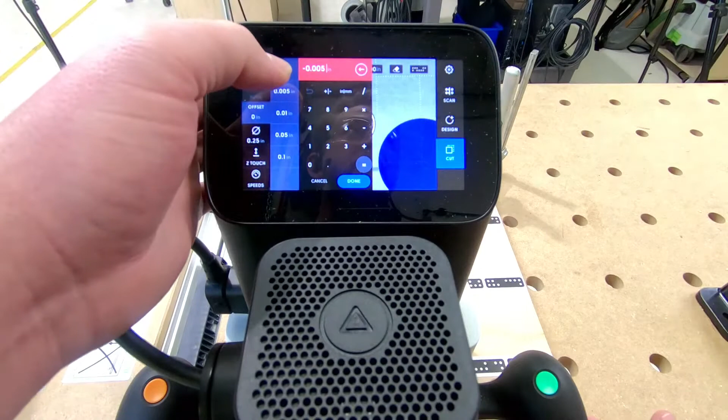Right here on the left side of the screen, I edit my offsets, go with a negative 0.005. The negative, again, is really important when you're dialing in fitment—I want to creep up on that little by little until I achieve the best fit. I just know in this case that 5,000ths is going to be perfect, so I'm going to make a quick cut here.

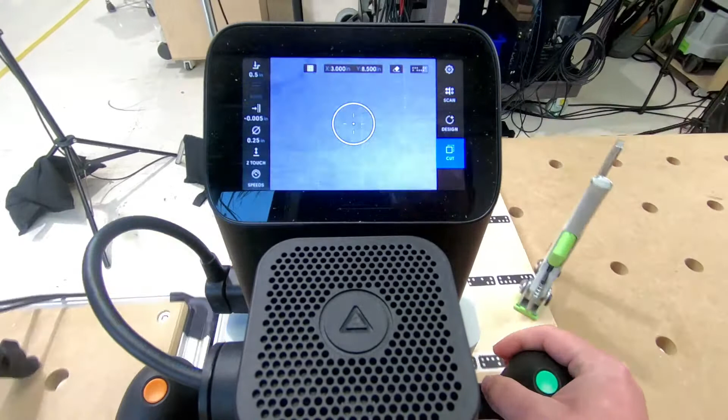And there we go—that's that exact fit we were hoping for. Just taking off 5,000ths of an inch, and even coming back to a workspace and being able to edit it because I haven't taken my tape away—that's the most important part.

So it's usually a case of measuring, doing a test with one element, and then rinsing and repeating across the whole thing. If you were doing all these holes on the top of this table, you could measure once and then come back and nail it every time. It's always good to have a handy pair of—I like digital calipers. I have them on me or close to me at all times when using Origin, because you can measure your depth with it.

You can always double check what you're working on. So we'll go back to the slide deck and have a quick look at this. This would have looked a little confusing initially. What we're looking at here is the green lines show the shape we're cutting.

If I tell it I want a 0 offset, that's the first one in the top left. We're going to cut that at the exact dimension defined in that SVG file, and it holds up. The same applies with on-tool design. So if you create a circle that's 2 inches across, a 0 offset will cut you a shape that's exactly 2 inches across. Moving on to the next image, a positive offset leaves material.

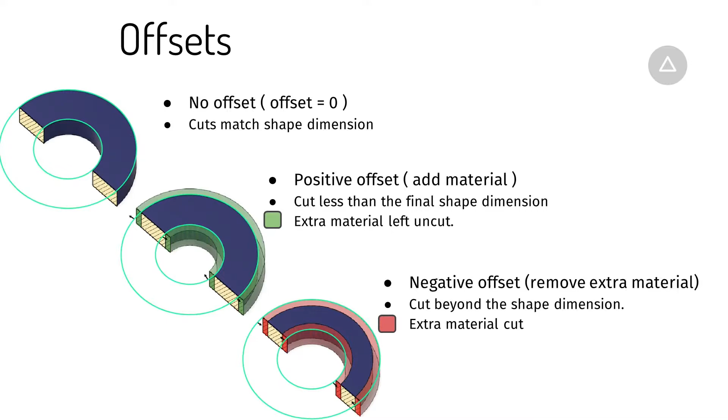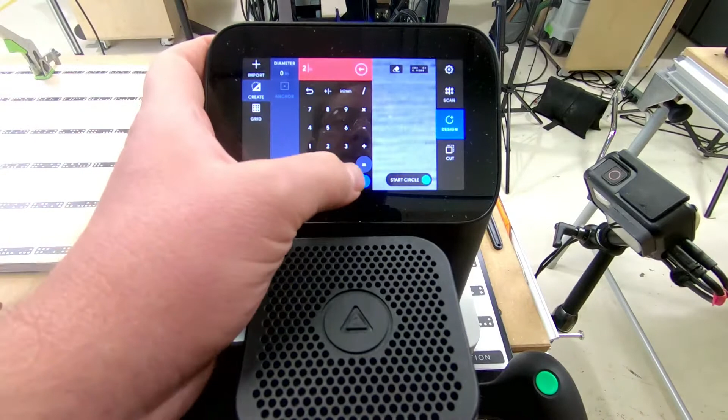Maybe we can look at just the screen for a second and create a single circle, and then do an exaggerated offset with it to show how that works. Okay, so just do a 2 inch circle. You can type this in - I remember that popped up last week. You can either type in or click and drag for circles.

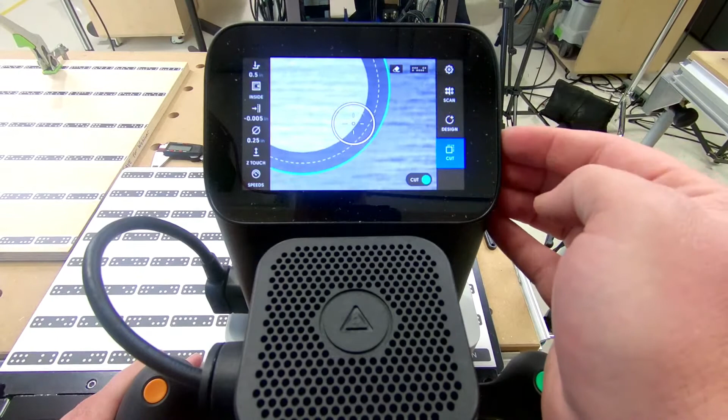Yes, so this is an inside cut. We'll move to cut mode. At the moment there's a tiny offset, so we can barely see it. We're going to exaggerate that, to 0.1, say - so that's a 0.1 positive offset. It's leaving that 0.1 inches, and you'll see the toolpath is updating live to leave extra material. The final 2 inch dimension is the green line, and you've left an extra 0.1 inch the whole way around.

If we swap this to an outside cut, and then move to the outside, you'll notice it behaves the same way. We're going to create a 2 inch puck that we bring out instead of a hole, but it leaves that extra 0.1 inch the whole way around. You can also do a negative offset, and you'll see it'll overlap that line - it'll take a 0.1 inch, making it slightly smaller in this case. You can see the toolpath is trimming more off beyond your green line.

The same applies if you flip it to an inside cut. That'll become second nature to you. Just know that if you're making a hole, a negative is going to make it larger, giving you more space for glue, and positive makes it smaller, making more friction when you go to fit it. So we will now move on to the next section in the slides.

So we're going to go through - Jake is going to demonstrate some of the basic concepts of cutting. One of the questions that cropped up was, can I set up tape on a panel and then reuse that tape, like put elements next to it and not have to constantly be taping up my plywood panels? And absolutely you can. Jake's going to walk you through some of the ideas there, how to make the most out of that.

Okay, so the reason I like this as a demonstration is we have long sweeping cuts as well as intricate joinery parts that need to be nice and tight with 90-degree corners. So I'm going to start here up the top of the leg.

Oftentimes when people are first approaching Origin, they want to treat it similar to a plunge router. They want to muscle it, they want to grab it really stiffly. If you could show this camera, their arms are very stiff and they're driving the tool more so like this. You should still have a firm grip on the tool, but it's more about connecting the tool and your body, using the fluidity of the whole thing to get a smoother cut.

So as I'm coming across, my body is coming with it versus staying in one spot and driving the tool necessarily. Back to the screen, I'll show you locking my elbows kind of into my side, coming around. Anytime I approach a corner, I slow down and I just bring it across, not aiming to keep that dot in the center of my crosshairs, but really just making sure my movements are fluid more than anything else.

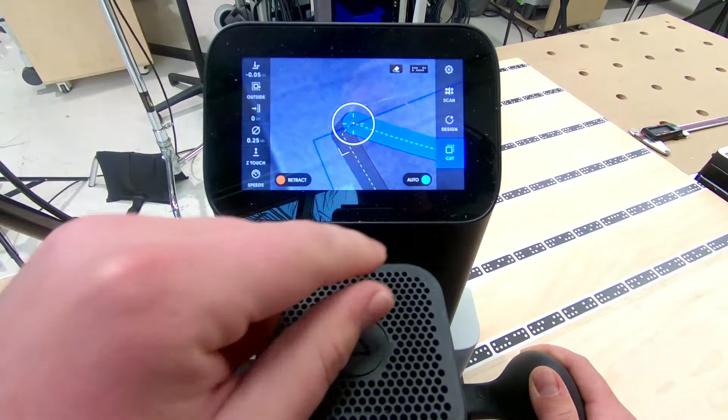These are the times where you can pick up a little speed as soon as you get comfortable, but always be sure that when you start coming towards the end, you slow down, pause - especially if you can get the entire corner in your correction range. That's when we're going to use our auto, and let the tool do the fine motor work for us.

Just help it get around those parts. Again, kind of long straightaways. Slowing down, not stopping though. Not stopping like I am and letting the bit burn there in that same spot. I want to be pretty quick on my feet as I come around things like this, but very intentional in my movements.

And finishing. And retract. Now this is for larger cuts. Later I can actually show what finer motor cuts look like. I'm going to come over to my workstation.

You see here we just have the positives of my inlay cut. But when we're doing smaller things, what I do, you can go over to this camera, I really use the side of my hands to stabilize the tool. So when I'm coming down, that side of my hand is resting on my work surface, whatever it may be.

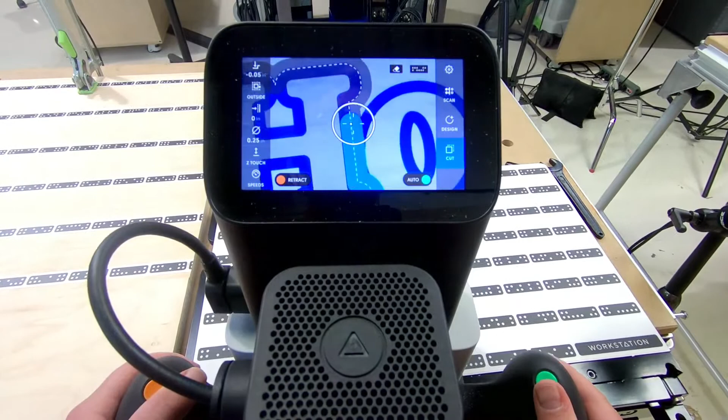And I'm using a lot more fine motor control just to kind of ease the tool around sharp corners and help. Sometimes I even, if I'm doing long straight lines, I'm hooking my finger around an edge just to make sure that everything's nice and stable.

With that in mind, I guess it's worth mentioning, Origin is incredibly good at handling sort of drift. Take advantage of that correction range and let Origin take care of the precision for you. Rather than, some people get too aggressive about trying to keep the cutter in the dead center of the correction range. So they'll do things like add a jerky motion to try and compensate, when they should just let the cutter drift through the correction range. So long as you keep it moving smoothly, you'll get good outcomes.

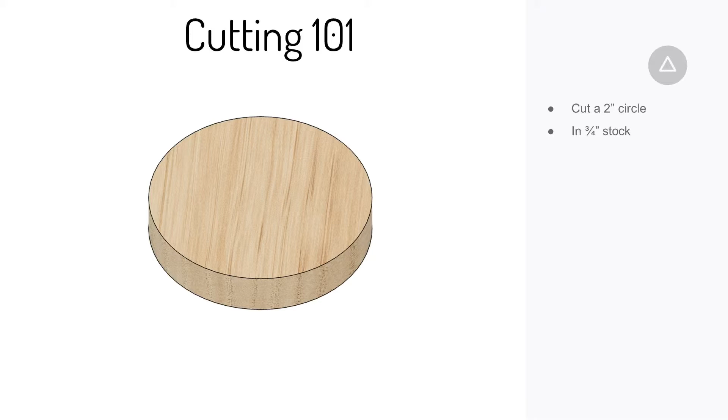Should we move on to the slides again? Yeah, yeah. So that was a brief intro into the sort of approach to cutting with Origin, getting the best outcomes. We'll get more into the actual process of cutting now, but more, that's the motion and action and strategy of how you'd approach that.

So if we were to cut, say, 3/4 of an inch deep, one of the techniques we use is common in regular CNCs and things, where we do a roughing pass and we'll cut, say, 3 passes to get to the final depth. So roughing passes are just to clear out material. It's to be efficient and just get the process moving, get all the material out that we can fast, and then we save our really accurate cuts for what we call a finishing pass.

So you'll see here one of the reasons why we do this. I've pointed out the little witness marks, so that's kind of fuzz that's left. If you were to cut with the same offset and then go, an offset of 0 at 1/4 of an inch, 1/2 an inch, and then 3/4 of an inch, this is the outcome you'd get. And you'd have to sand it a little bit.

So what we do is we do roughing passes, which is bringing back the concept of offsets. So you leave a positive offset, say 0.01 or 0.02, a very small positive offset, and then you come back at the end with a 0 offset when you're at the final depth.

So for your last pass, you're cutting at the final dimension, and the key there is the cutter is effectively very unloaded. It's just doing a final finishing cut where it cuts through the full depth and clears away all that fuzz, and you get a very accurate outcome because the cutter's not deflecting, it's not loaded. It is tempting to move quickly for your finishing pass, but once again, Jake's actions, make sure you're moving smoothly, the same as you would ordinarily, and you'll get very accurate outcomes.

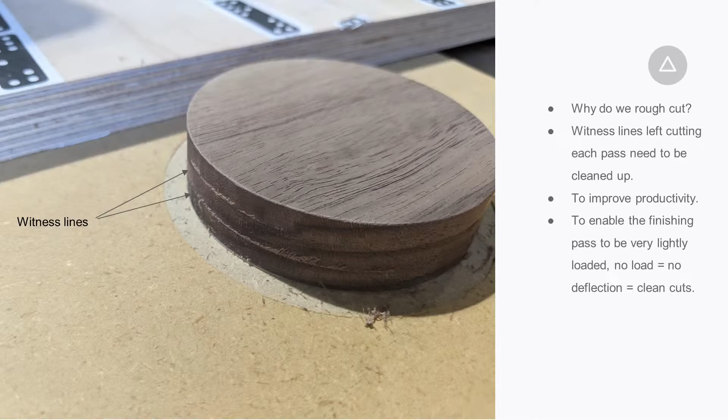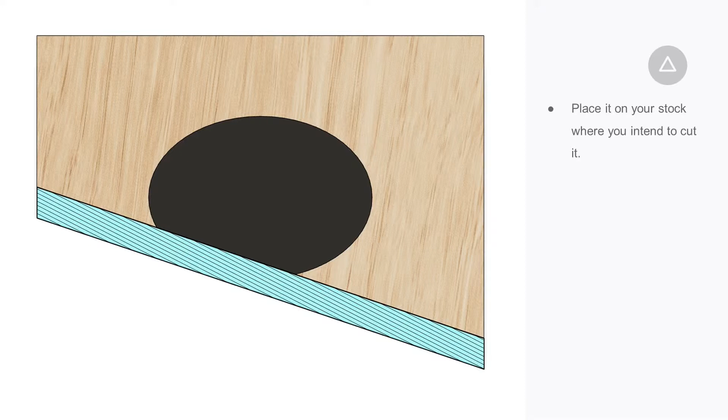So we'll go to the next slide. So yeah, the concept is, you want to cut, I forget what it is, a 2-inch circle, place your outside cut element. Next slide. That goes on your stock. We've got a little section line through here, so we can sort of see what this looks like as we go. So next slide. So the first pass, you can see the settings down on the bottom left there.

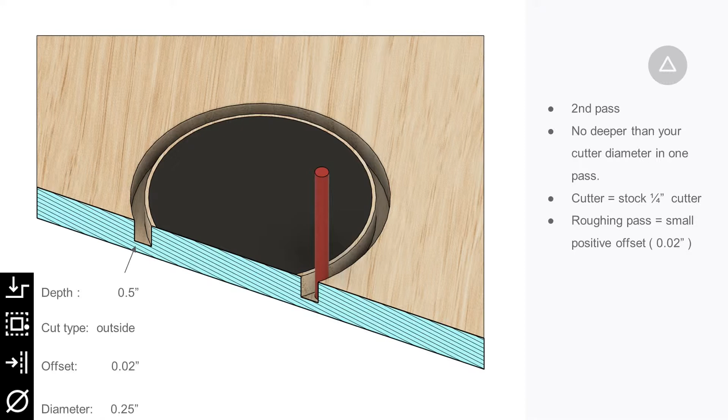So we do one pass, 1/4 of an inch deep with an offset. This is a roughing pass, so we're going to come back later and remove that 0.02 inch offset. Then we just go through and do a second pass. We can repeat this, as long as we've got cutting flutes long enough, we can repeat this roughing process until we get to the depth we like. So this is the 1/2 inch one, this is halfway through.

In this one, you'll notice this is a 3/4 inch element, and I've set the depth to 0.73 instead of 0.75. So what we're doing here is intentionally leaving a little skin on the bottom, which I've pointed out with the arrow. That's a great way of holding elements in place while you cut them. If I was to cut the whole way through, I'd be relying only on the double-sided tape behind the shape I'm cutting out.

One thing worth noting is leaving a skin means that during this pass, where I'm removing a lot of material, it's not receiving as much force on the side of it, so it's less likely to get pulled out of alignment, and less likely to break out of the double-sided tape.

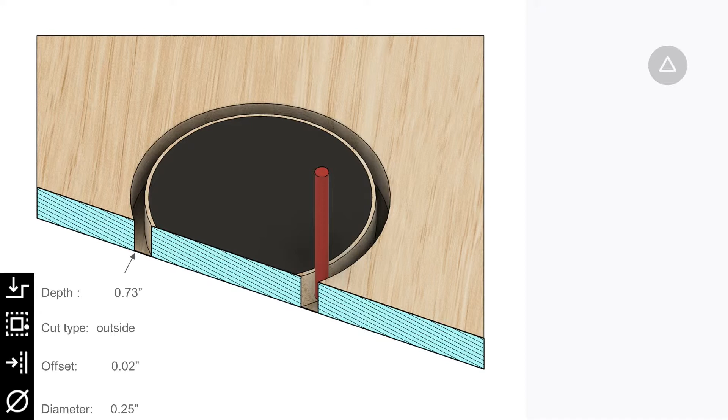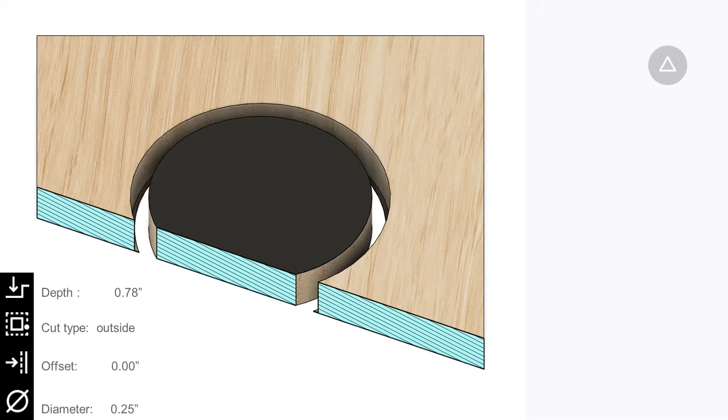So that's the strategy of a roughing and a finishing pass. This last slide shows the finishing pass. You'll see the offset set to 0, and we've moved in by that 0.02, and you'll see we're cutting at the final dimension. I hope that's clear.

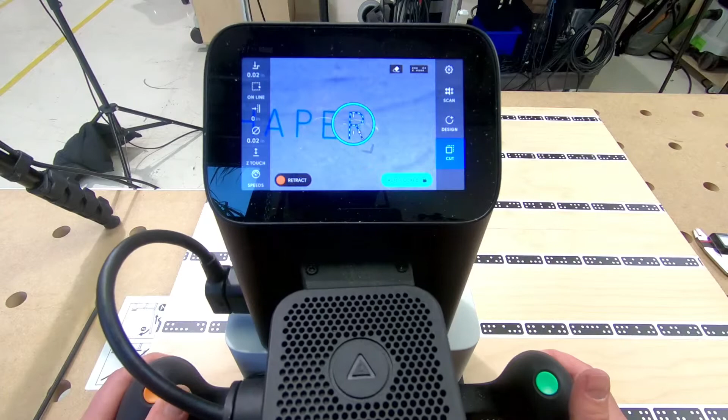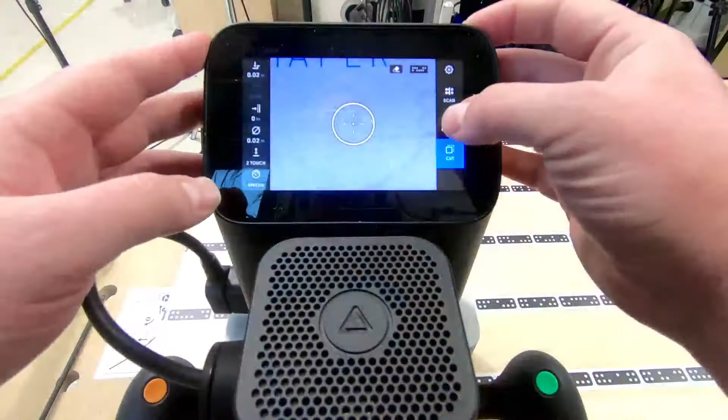And there we have it. It's difficult to see because it's so small, but that is our default size engraving. It's just as easy to edit that to be whatever size you want. Keeping in mind, as you change your cutter or change your depth, the width of your cut or your engrave will change with it. So just grab this.

Yeah, perfect example. Show that. I don't know if that fits there.

So for this cut, kind of your standard national park sign, we used a bullnose bit, a 3/4 inch bullnose bit, still with a 1/4 inch shank, which when we dial in that depth, I only went 1/8 of an inch deep. It gives us that really nice kind of curved side edge. And this is still using the same on-tool text function. I just changed the size of the text to say 2 inches, 2.5 inches.

We came down here and used a similar bit, but smaller, also a bullnose, but at a 1/4 inch to do this. Over here, I have this set to the same depth, 1/8 of an inch. And here I took half of that off and I went 1/16 deep, just to show a little variation in how that affects it.

And then maybe you can talk us through how you went about coloring it and everything. What was the technique for that? And then we'll go back to the slides.

That is the fun process we call paint sand. So whether it be hardwood, plywood, softwood, whatever it is, a quick, easy way to make a fun sign is to cut into it, just as I have done, spray the entire surface with spray paint, and then sand it back, leaving only the part that you've cut actually colored. Couple of tricks there: wood is a bunch of fibers, it tends to suck paint through, so I advise doing some sort of a sealant before you apply the paint, and that will help it from sucking paint into the grain as well.

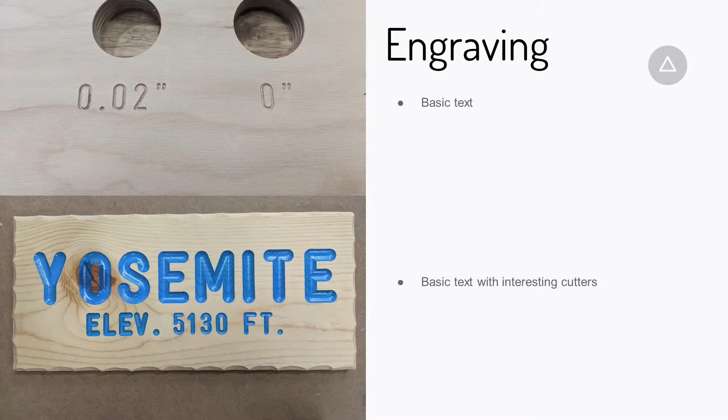So this is, if it wasn't possible to see his initial engraving, it will look exactly like that engraving at the top there. So that's basic text, just engraving anywhere you like. Origin's readily able to do that for you really quickly. And then getting creative with different colors and things and scaling it up, you can achieve with paint, the bottom option there. And then we'll move to the next slide.

So we'll just talk through how, if you're not going to use basic text, which is the on-tool, there's one font available there, which is the one we've just displayed. How would you prep that file in a software package?

So basically, Origin takes text as curves. So what does that mean? If the text in your vector editing software shows as editable, like you can type it in and edit it, press the backspace key to delete it the way you would in an email, chances are that's live text. So most of the software packages we've ever used have the option of automatically converting that to curves, which means each one of them will be treated as a shape, an SVG shape. You don't have the ability to type in more text.

It treats them as any other shape. So it might be a star, it might be whatever. These happen to be text characters at that point. So you can either turn them into that in the app, or if you have a look down at the bottom of the screen there, there's support at shapertools.com and designing for Origin. There's various export settings for all the different vector editing apps that will include how to convert that when you save it as an SVG.

Yeah, so we'll move to the next slide.

So in the process of preparing a shape for inlaying, we'll get heavily into inlaying in a little bit, but basically with a round cutter, we cannot cut into sharp corners. If we were to just cut this and pour paint in, it'd be fine because paint can flow into any shape that you provide for it with a pocket.

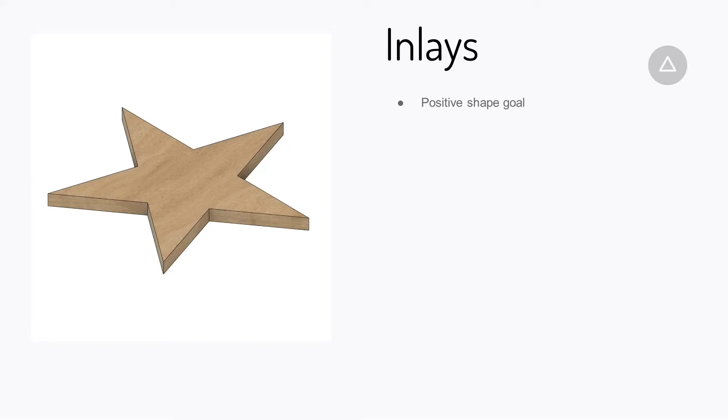Then your goal is to cut the pocket, and that will all fit together perfectly, right? So we can tune that with offsets and get exactly the friction we want. So then next slide, and it will look like that.

Everyone's happy. Well, it's not quite that simple, just because of the way cutters work. This is the same with any CNC. Basically anything with a kerf, you need to consider these sorts of things. So next.

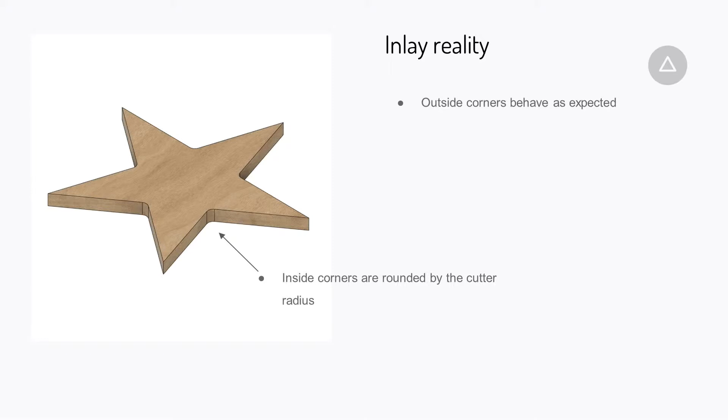So when we're cutting the positive element, on all the inside corners, we get this little round over detail you see pointed out there with the arrow. You'll notice it is able to cut the outside corners very sharp, but then when we look at the next frame, the opposite happens when we're doing the pocket. You can see the cutter in there. It's unable to get into those corners because it's a large round thing, not an infinitely small point that's cutting. So this is showing a 1/8-inch cutter going into the corners of a 2-inch star.

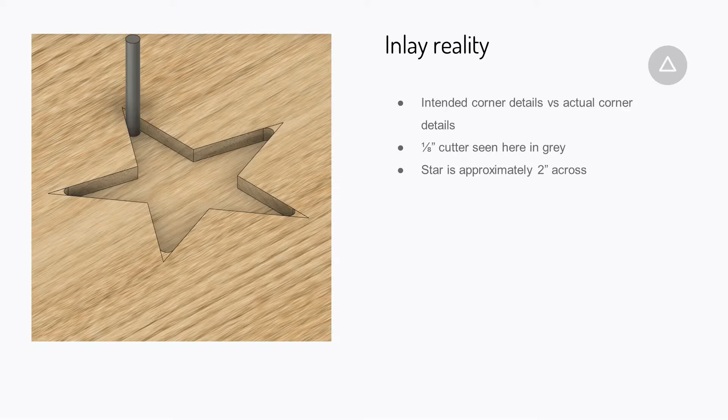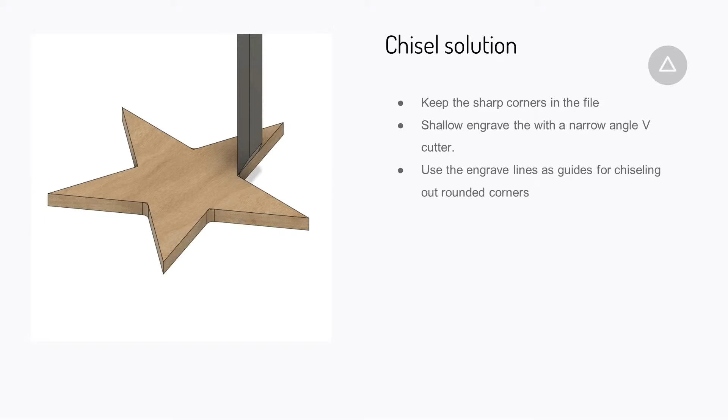So I'll just quickly show you what that looks like here. Next slide. So yeah, you just chisel those rounded edges on the positive, and then next one for the pocket, go into those corners. That'll save you a lot of effort, and you'll get very sharp details. We'll go to the next one.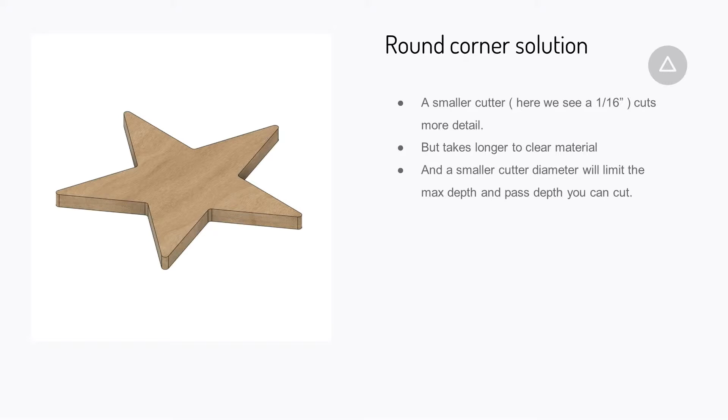So yeah, the smaller you make that radius, the smaller the cutter you have to use, but the more detail you get. So it's a balancing act between how efficiently you want to cut this and how much detail you want. Obviously, a larger cutter is going to remove more material more quickly, and a smaller cutter is going to get you more detail, and it's up to you what the most appropriate approach there is. So next slide. And yeah, this is showing a really exaggerated 1/4-inch cutter, which gets you a sort of blobbier shaped star, but depending on how close you are to it, that may be appropriate.

Keep in mind, this does also bake in the scale of the object. One of the beauties of Origin—one of the questions mentioned, can I scale my logo on Origin? Yes, sure, and Jake might be able to go through that in a second. But the moment you start putting these radiuses into your file, you won't be able to scale the file down and still have your inlays fit, unless you get a cutter that's half the size. So say you had a file designed for the 1/4" cutter, and you scaled your file down by half, you'd then have to use an 1/8" cutter to cut the same corner details. Hope that makes sense—it gets pretty clear once you get into it, and Jake will walk you through that now.

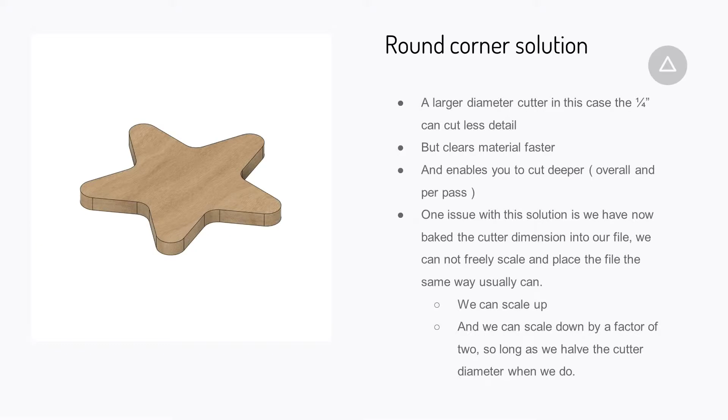Over on my workstation here, this is a fantastic way to cut smaller pieces on the shelf. I have a piece of roughly 1/8" material as my positive piece for my inlay, and my negative piece is over here. But I want to show this.

This... and it's got my inlay positives. Got camera issues?

Can you go to my Origin screen? We might have to power it. Oh yep, there we go. All right, so these are my positives that I cut that I showed you earlier.

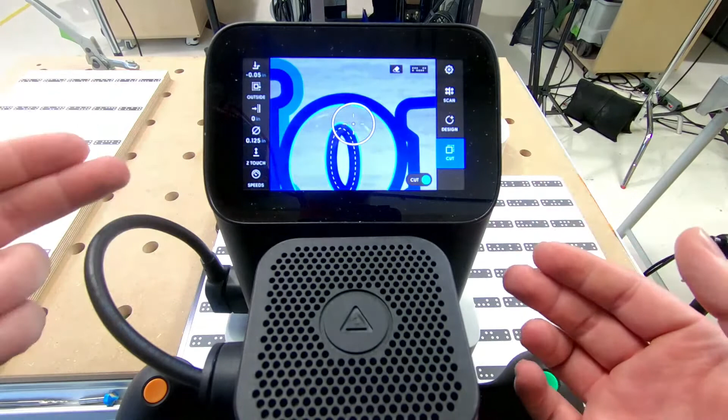I've cut these to a 0" offset because I know that I can edit my negative offset on my piece over there if I tilt this. I can edit the negatives over here, and I can dial in that fit by taking little by little off. So I start with 0, and I always cut the positives first, and then I move to the negative.

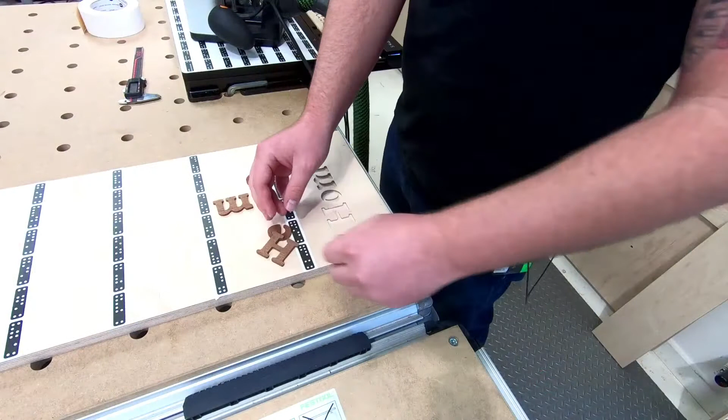So I've cut these out—I've actually had them over here in Sapele. There we go, apologize for that. So now I have my positive letters cut out of Sapele.

That is not what we're spelling. We're spelling that. And I went ahead and started on this just for the sake of time.

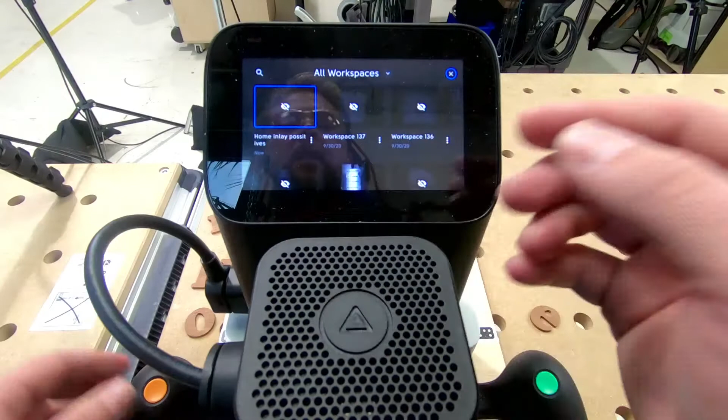Whoops. And I'm going to change my workspace to—I like to name my workspaces. I have my positives, and I have the home inlay right here.

My offsets currently are all set to 0, and I know that that is a little too small. It's close, but I want to take a little bit more off so that they fit better. I'm going to creep up on that, so I'm going to do a negative 0.002 and just take that off real quick.

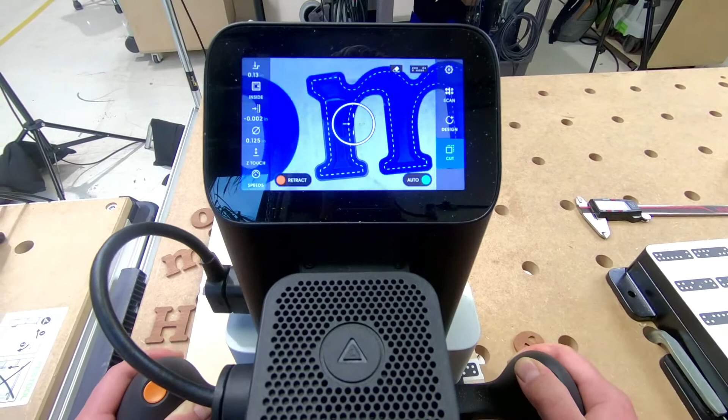And I still have one more that I need to pocket. I'm going to edit that offset back down, turn that to 0, and I'm going to pocket out this material here.

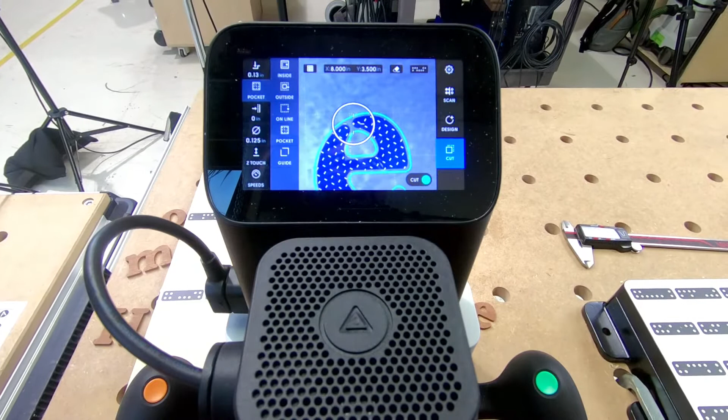We'll just quickly walk through what's going on on the screen there. That was us looking at pocketing. I don't think we displayed this last week, but what's cool here—and this is a common thing that happens on files like this—you'll notice at the top of the E, it doesn't join up the whole way. So just move up a little there. The pocketing operation has a little offset on it. Here he's using a 1/8" cutter, and that gap—the pocketing doesn't enable an 1/8" cutter to fit through that gap.

So pocketing has to be done in 2 steps. At the moment he's done all the pocketing, but it's not the final dimension because of that little offset. So he's going to now change it to an inside cut and then cut the final dimension. Pocketing is a 2-step operation. And if you ever find you have a shape that's a pocketing operation and it's not showing you your toolpaths, there are two things you can do: you can either change it to an inside cut just to confirm the dotted lines show up, or you can check your offset.

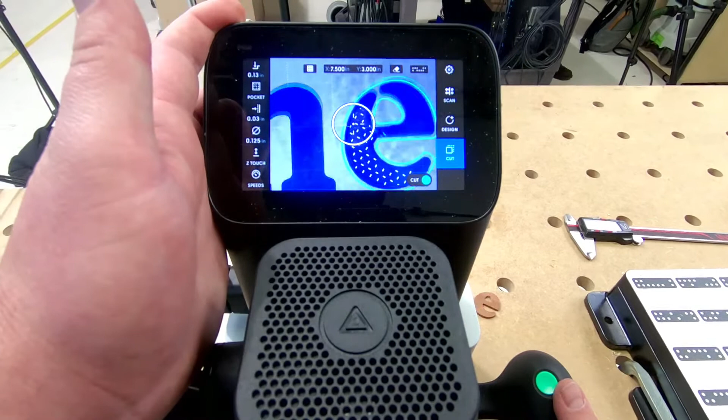So we'll go back to pocketing and have a look at how it would display if it had an excessively large offset. If this was 0.1, notice how there's no area available for pocketing—it could be easy to think something's wrong, I don't know why I can't cut that. You'll notice as he uses smaller and smaller offsets, more and more of that pocket becomes available for cutting, and at 0, it's most of it. If you ever find yourself not seeing a toolpath you want to cut, double check that offset. And if your offset is already 0, the next thing to try is making the cutter diameter smaller, since a larger diameter cutter won't be able to get into those areas in a similar fashion.

So if you want to check if you can get a cutter in there, make your cutter a small size, make sure there's no offset, and then go from a pocket to an inside cut just to confirm you can actually get a cutter in there. Those are the 3 sort of tips for navigating that.

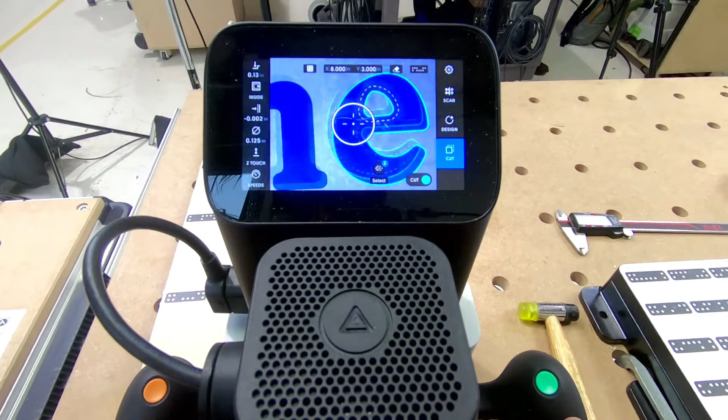And another thing that's interesting, like with all this, there's plenty of options for how you approach this. Jake could come in, and if he doesn't like the friction, he could take another 1,000th of an inch off. There's also, like I've had situations where I change my mind and will actually - because our tape is still aligned perfectly - he could mill out that entire M and place it again if he wanted. There's some pretty significant recovery options on the table.

Yeah, especially if you make a mistake - especially because we've already cut another set of letters over here, which I'll probably end up saving for another demo. But yes, you could completely cut this out as long as we keep that tape and don't move it. In fact, until my project's ready for final sand and finish, I'm going to keep that tape on there just in case. So, last letter.

That's a good rule in general. It's very tempting to take the shaper tape off and take something out of its fixtures. But keeping that tape in place means you can come back. Like we've had people realize they've made spelling mistakes, and they'll come back and pocket out a little rectangle with a radiused edge, and then pocket, create a little positive plug, and completely replace an entire letter in a sign or something.

Something I want to note too before we move on is when you're dealing with delicate materials like this - thin veneers or plastics or anything - make sure, if you're using double-sided tape, getting a thin flexible putty knife like this is going to really help you wiggle your way under these things and gently pry up that double-sided tape without breaking your pieces. So again, you've got to think about that grain direction and what it's going to do. If I try to pry it up one way versus another, I like to wiggle the blade all the way through, get right under it, and then I can safely pull it up.

So if you can go back to the slides. This is a great one. We were asked about someone seeing a little divot where they started cutting, and the bottom of their pockets were not dead flat. The key is to apply constant pressure on Origin's handles throughout the cutting operation. If you're holding it loose and then tap the green button and hold it with different downward pressure throughout the cut, you'll see different cut depths. It's possible to push a little firmer and it'll cut a little deeper. So it's your job to try and be as consistent as you can throughout the operation, and you should get clean outcomes.

Anything beyond that, double check your spindle clamp and collet are attached firmly. Collets occasionally need to be cleaned out. I've seen that if a collet is starting to get worn, it'll loosen up while cutting. With an up cutter, like the stock one we ship with, that'll cause your cut to gradually get deeper as it loosens and starts inching its way out of the collet. So if you start to feel strange vibration or see your cut depth change throughout a cut, double check that collet. It's a consumable, it'll last much longer than a cutter, but you need to keep it clean and not over torque it. It's tempting to go crazy, but from that point on it gets a little deflection or deformation in it, and it becomes harder and harder to fit.

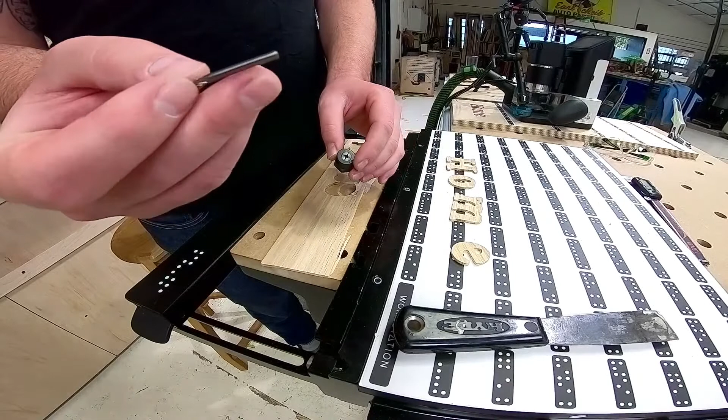The 1/8 inch collet is available in the store. We don't have one here, but it's perfect, especially talking about inlays, for doing these smaller cutters. Ah, look at that, there it is, 1/8 inch collet. It allows you to use much finer cutters. They're also significantly cheaper for the most part.

Cutters aren't so much expensive because of the material you start with, it's grinding the cutter that's expensive. So if you're creating like a 1/16 inch cutter and you start with 1/4 inch stock, it's much more expensive than starting with 1/8 inch. You'll find yourself getting a lot more value for money out of your cutters if you're doing really fine detail stuff with the 1/8 inch one.

Okay, that answers that one. We'll move on to the next one. This is a good one: can I scan something and trace it using the pen tool? We're going to use the pen tool for that, which we haven't really dove into. We'll use a good example.

Like the wrench that comes with the tool, place that there, just take a pencil and trace around a bit. Now I'm marking directly on my material and then I'm going to either add to scan or rescan. In this case I'm just going to add to scan. And we can just follow along.

Worth noting, the pen tool is set up to make kind of faceted straight lines. So it's great for an octagon or sort of rhombus type shapes. This is going to be a little different in that it's a curved surface. So what you have to do, or Jake will walk you through that, but just know it's not like a standard conventional Bezier path, it's not a curve.

I'm just going to redo my scan here. Yeah, you're not going to get curves out of it, but it's nice for a quick and easy shape.

Go. And there's our pencil line right there. Into create and pen, now you're going to use that green button, and you're going to drop your points. For this area, I'm going to go a little tighter with my points. Whoops, that happens if you double click on a point too quickly, so I need to make sure that I move away from the point.

With the pen tool, clicking twice in one place, you'll see how in the bottom right it's saying finish, that's when you're finishing the shape. It'll highlight blue and ask, do you want to finish? So this is a great way of quickly getting approximate forms into Origin, ready to cut.

The alternative, if you're familiar with vector editing software, you can do similar stuff by dropping something on a flatbed scanner and scanning it in. You get dead flat shapes, you get the scale already, and then you just trace it. If it's an organic shape that doesn't sit flat on the scanner, it can be a little blurry at the edges, but that's one other avenue of doing this type of work. Alternatively, you can talk to Shaper Assist, snap a photo, send it to them, and they'll get you the shapes you need.

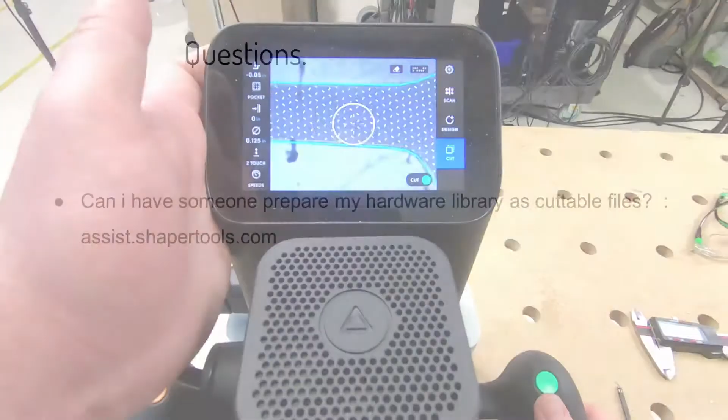So that's now a shape that's readily available for cutting in that workspace. Jake can cut that if he wants, we won't do that right now, but you get the idea. We've got quite a few to get through, so we'll move on. You can see we can change the cut types to whatever we want. Oh, this is nice and relevant.

One of the questions was: I've got a bunch of hardware that I install in various jobs, I don't want to blow time learning any software, I've got Origin, can Shaper Tools get me my library? And yes, assist.shapertools.com, follow the little intro there, and I think we called it out in last week's one as well.

You can send in whatever's possible, be it a PDF of the cut recommended shapes, the guide you get with it. You could post us the hardware or send us a link to CAD, there's any number of approaches for how you get this data to us. The standard approach is just a sketch or a link to a PDF or whatever, and we'll prepare those files for you with all the depths called out, so that you can readily cut them with Origin without having to touch any software.

So that's assist, by the way. Can you cut a hole that's exactly the same diameter as the cutter? Now this used to be a problem, Origin couldn't do this initially, but this is one of the areas where our software improves over time. We've actually added some smarts where it recognizes there's a circle, and recognizes the cutter is exactly the same as the diameter hole we're trying to create, but still enables you to cut it.

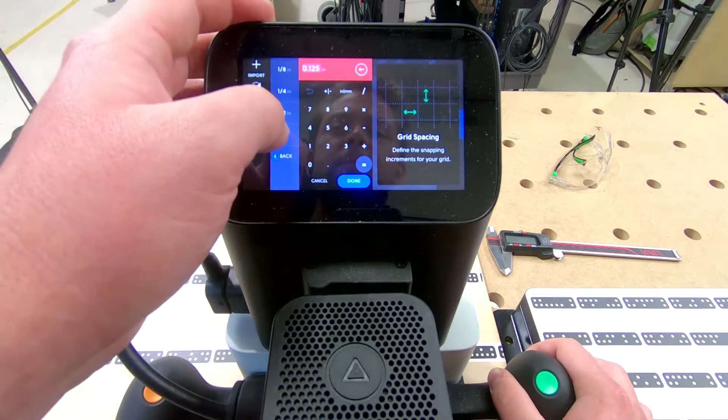Because Origin knows nothing about the actual stock in its standard state. Once it's scanned that tape field, all it knows is where the markers are and where its cutter is relative to the markers. So now we're taking advantage of that, letting the cutter tell us where the edge of the stock is relative to the markers, and then we can start laying things out very accurately.

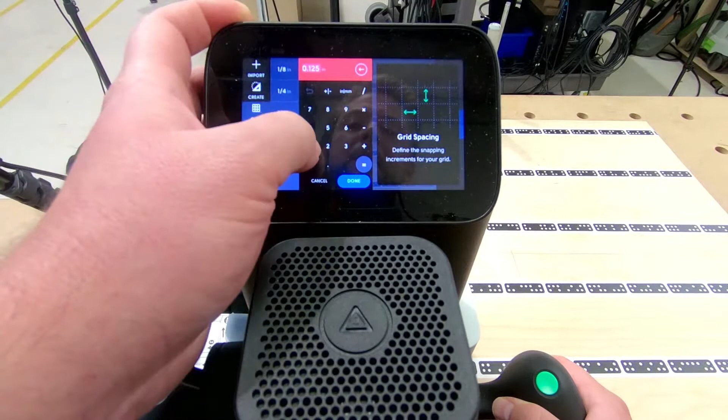So now as I zoom out, you can see that exact point down there at 0. I can adjust the size of my grid just as easily. Right now it's at 1/8 of an inch spacing - let's make it a little bolder, 1 inch spacing. And I get an X and Y readout here at the top of exactly where my origin is in my grid.

So once you've created the grid, you're no longer free-form placing - it's now snapping to those grid increments. If Jake was to load in a shape, he'd be able to place it, and you'll notice if he rotates, the shape remains orthogonal, so you don't have to worry about being 2 degrees off in your placement.

Maybe walk them through the anchor points as well. So right down here where it says anchor, currently I'm grabbing the very center of the shape or design. I want to use my bottom left because I'm going to snap that bottom left to my 0,0 point. That's what I'm going to use to reference my next side once I flip.

Now that's it - you'll notice that green line around the outside edge. That's a bounding box drawn around it. Those anchor points are the bounding box of that shape. So if you were to place a circle, it would be using a square bounding box of the entire circle. So sometimes if you want very specific placing, people actually bake in a bounding box, kind of like what Jake's done here. They'll put a guide, a big rectangle around their shape, and then place it relative to that exactly where they intend it to land.

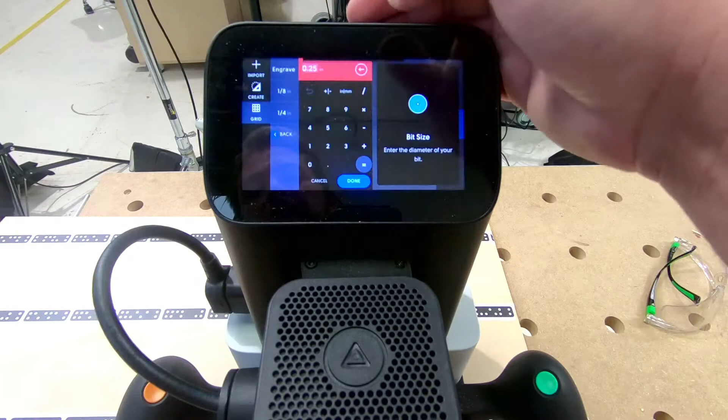Important things to remember - we want to set our bit size to really 0. Actually it doesn't need that, you can leave it and use the centering option. Oh okay, yeah, so put that back to a quarter.

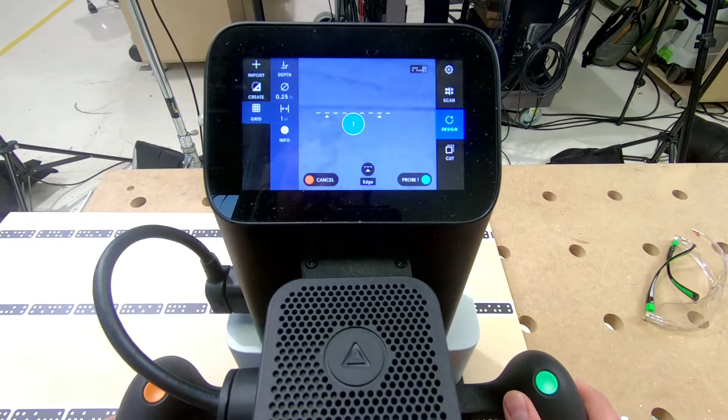And then in the center there's the option that says edge. So this now updates live, and it will toggle between top, bottom, or centered. So when you're on a line, now he's looking at the very point - he's using the center of the point instead of touching the top or bottom edge of the grid. So he's looking underneath there to get that perfectly aligned on his mark.

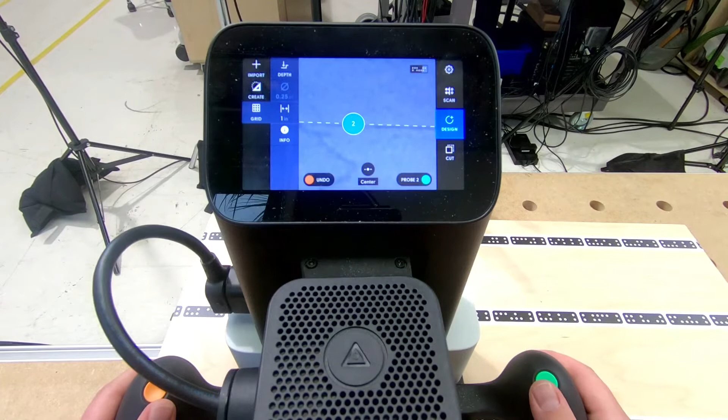The screen's pretty good, but if you're going to this effort, chances are you want it more accurate than just quickly clicking on screen. I've surpassed my center point, put my two outside points, and I'm coming back to my center crosshair, and I'm dropping it right on there. Now I have a new 0,0 exactly on my physical X drawn on my material. Again, really handy if you're doing something in a larger space and don't have an edge to reference off of - you can still get a perfectly parallel shape.

Yes, I think the question was tied to, like, if you were doing a large table and had tape on it. This means if you were doing a little logo in the left edge of it, you don't need to tape the whole thing, or if it's in the center, you don't need to probe the edge and then go to that point. If you've got a pencil mark, that's enough - you just put tape near that, scan that, and then you can do your little operation right there.

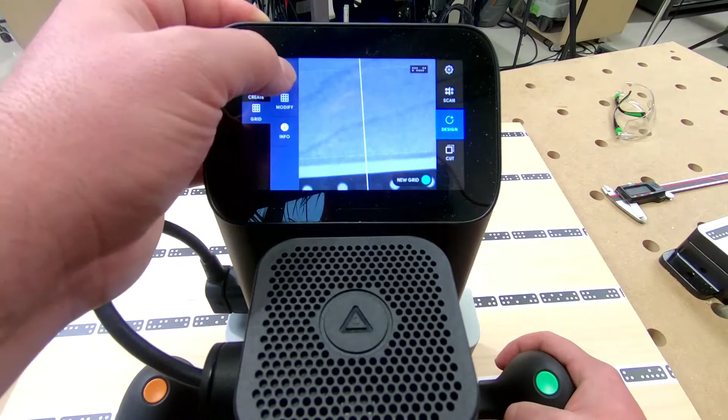So worth mentioning, grid is super powerful for any very specific placement of objects. This is how we tell Origin where the physical world is, so then we're super accurate within that. You'll notice it's drawing the x-axis for us as we go. So Jake's probing the left-hand side - this would be the bottom of the surface.

And then if he was to cut his holes here and then flip it, he could then probe the right-hand side. So let's just go ahead - oh, there's no tape on that side. So yeah, he's got a few things colliding with him there. Smaller workspace, which means you can work on both sides - you don't have to probe the left side. You'll notice that with those little toggle buttons in the middle.

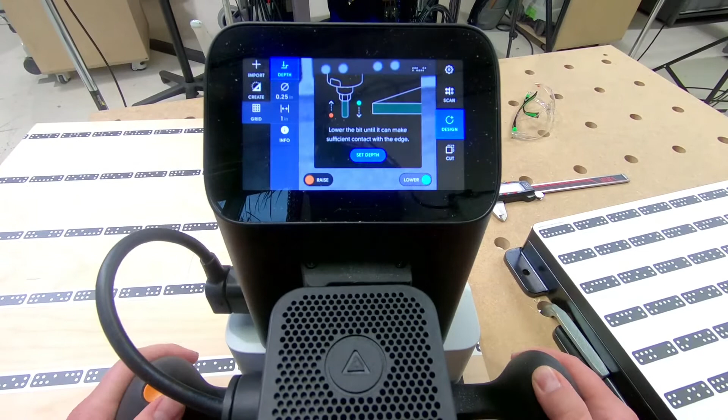So he's lowering down to get to the right height, then probing on the left and right. This is where he can choose the bottom, top. He's doing the left, spreading these two. The first two probes are the most critical to make sure everything's dead straight, because the third probe is always at 90 degrees to those first two. So if you do those first two really close together and there's a bit of dust or a wood chip, that introduces potentially quite a lot of error. But if you're a long way apart for the first two, you get very accurate outcomes. So now this would be, if he flipped his board, he's now probing from the right.

You can then place your shapes. Do you want to show them that quick hack for flipping a shape when you place it?

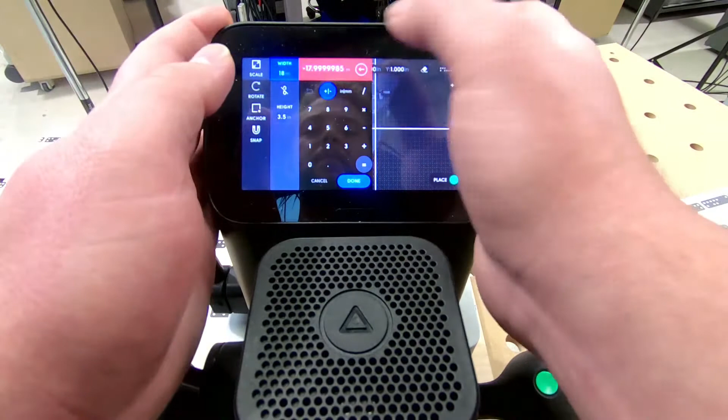So say, place your leg, I'll work you through it. So there is actually the ability to flip a shape on Origin, like if you forget to do it in your digital file. Here's Jake about to place his shape as he would on the top, but now he's on the bottom, so he wants to flip it. Go to scale, decouple the proportional scale, select width, and just hit negative, then go done. So it flipped in the X, or horizontally. Now if he went and placed that using the anchor point on the bottom right, he could match the top and the bottom, should there be details from the top and bottom. Obviously it's cleaner to create a top and a bottom asset in your software of choice, but if you're stuck in the field, that's a great way of working around that.

Right, that's enough grids for a little bit. Let's see what else we got.

Oh yeah, nesting shapes. So you can lay out your shapes. There's plenty of options—I think Fusion's actually just introduced one where you can very accurately lay out shapes on your object. With Origin, you don't cut one pass across a whole large panel, that's important to remember. So even if you had all your SVG shapes laid out on a panel of ply, if you were to cut one pass deep, as often on a gantry CNC you would do, it would go around and cut to one depth across the whole surface. It would destroy all your tape field, so as you move across, all your tape would be cut, making it difficult to track throughout that process.

So with Origin, it's more common to nest as you go. As you're placing shapes with Origin, because you can see what's being cut—maybe have you got a workspace there with anything like that? Bring something in. You'll see A, the shape you're cutting, and B, the blue line, your cut history, showing what's actually being cut away. That enables you to accurately place the next object, or you could just do a quick air cut to show what that looks like. The key there is to start close to you and then work forward.

If you've already got the logo as an SVG file, it's much like how we flipped that shape earlier. Whenever you place a shape, just grab the handle—Jake will walk you through this. For this example, I'm going to grab that center anchor point, and right here in our options on the side, we have scale.

An important thing to note: I'm going to cut this with an 1/8 inch cutter, but I can make it bigger and cut it with a 1/4 inch cutter. But if I make it smaller, as we talked about earlier, our radiuses are going to shrink.

So if I make this bigger, let's actually use our calculator and double that—that's actually really powerful, by the way. You could multiply it by 2, or make it 125% of its size by going times 1.25.

Just to show you what our corner radius looks like now. If I were to change this to a 1/4 inch cutter, I can fit in there with a 1/4 inch cutter.

So when you're placing shapes, you have the option of making them any scale you like—just make sure your cutter can accommodate that change in detail. And then, to create that shape...

Ted might be able to link you out to some examples of tracing vectors, tracing raster images, and turning them into a vector using Inkscape. There's also a little program on the iPhone—Capture, that's the name. If you do some Sharpie marks, or your logo is pretty legible, you can create SVGs with it, and it has some basic tools for adjusting how that comes out.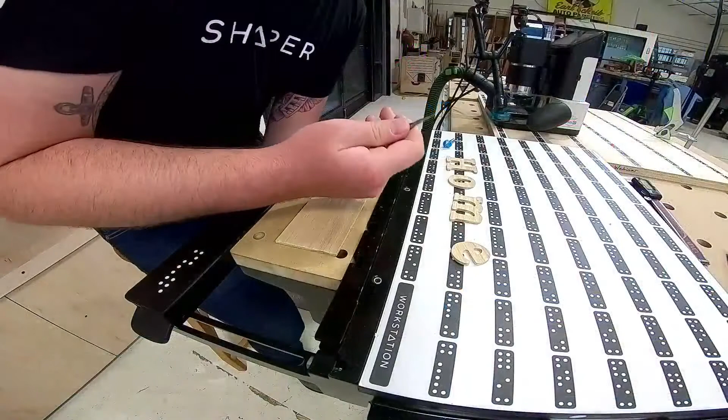I'll let Jake describe what's going on here. Basically when we're telling Origin what size our bit is, say a quarter-inch cutter or whatever, we're using just the tip of the cutter that's being introduced into the material. In this case, a conical shape, it tapers in, but we're still going to take that measurement with the very tip of the bit.

Same situation here, which is a round-over bit. We're going to use our digital calipers to measure that, set that as our bit diameter, and play with offsets to find that perfect contact point and get, in this case, a perfect curve. The deeper or closer, smaller the offset we have, the more dramatic the tapered angle is.

Did I explain that well? Yeah, basically with this little guy, if that's an eighth of an inch across at the top, and you measure an eighth of an inch, the toolpath is going to be centered, half of that off the edge of your surface.

So it's going to run along this edge, and as you plunge down, if you're down to that 1/4 inch radius. If you plunge down to 1/4 of an inch, you're going to get a perfect round over with your geometry.

Worth mentioning, this is a huge advantage if you're doing lettering and sign type applications over a bearing following bit. If you're trying to do a post operation with a traditional router, the bearing will dictate the level of detail you can get to. Whereas these, you can get even more crazy detail with a tiny point like that. It can get right into the corner of, say, an N or something like that, and round it over consistently the whole way around, rather than a following bit that's going to miss those inside corners.

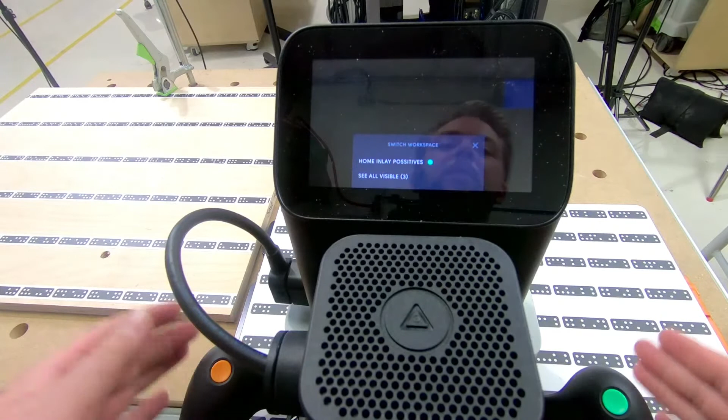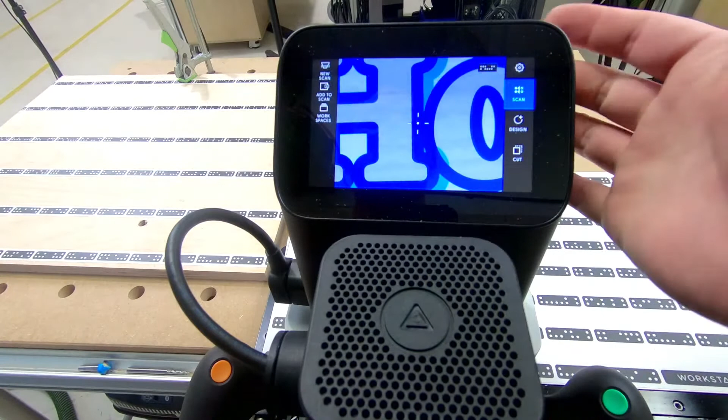As I move from one workspace to another, I want to show you exactly what comes up on the screen. It's going to recognize that tape. Now this is the workstation—we've scanned this thing hundreds of times, but my most recent one was the home inlay positives. It's going to remember to name a workspace; you stay in scan mode right down here at workspaces.

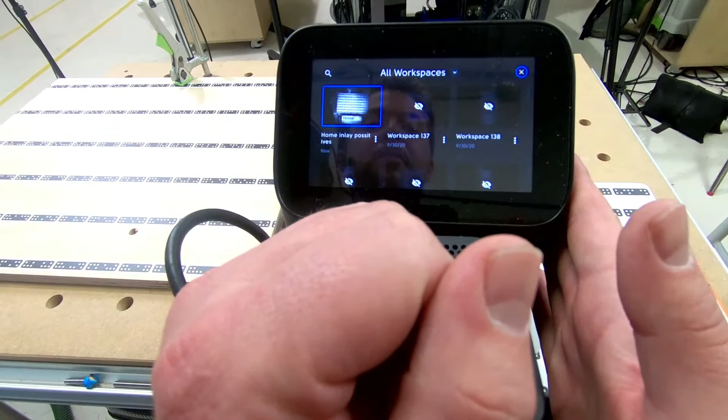A couple things we can do. As the selected one in blue, home inlay positives, we can either rename that, or duplicate it if we're making different versions. We can also get rid of it. I typically don't recommend deleting workspaces until you're absolutely sure—it's not necessary, it's just in case you ever want to delete, but I typically do not delete my workspaces.

Same thing when I hop back over to this workstation—it's gonna give me... whoops. It's gonna recognize that as what we worked on earlier, and that's mapping to the green button as well on the handles. You don't actually need to take your hands off Origin to just jump between projects. We've found people in schools and environments where they might be sharing a machine between different people on one workbench find that super effective to jump between projects.

Especially a two-part project—you have the negative of your inlay and the positives of your inlay. Those should be two different workspaces. They will be two different workspaces. Do yourself the favor of renaming them, so if you ever need to come back and recut that part, all the work is already done. You have everything there.

Any other ones? Yeah, I noticed there was one asking for the maximum size helix hole. We actually linked out—Ted included it in the chat—to a community post about helix operations. The maximum diameter cutter that you can put in Origin without having it collide mechanically is a 1-inch diameter cutter. So that's, I mean, you're probably not going to want to use something like that for helixing, but there's a balancing act with helixing, and it'd be worth checking out this diagram in the link.

I should have put it in the slides, but in the community post it talks about the maximum corrective range—that's the area Origin can move across. You'll notice as it gets near the edge of that corrective range, Origin starts to decelerate, so it doesn't collide with the edge of your correction range. That's a pretty ugly experience. So it slows down at the edge, which means there's a border around the edge that's not super useful for helixing, because Origin is going to be slowing down way out there.

So this is an example of a carbide insert cutter that doesn't have the ability to plunge. There's no cutting elements in the center, so if it goes straight down, it's going to collide with the center. Now, worth noting, helix is one situation where it can work around that, in that the cutter is going to be moving about 0.4 inches as it spirals down, so it could clear that.

But if you were to do a regular cut using a cutter like this, it would try to plunge straight down, collide with that uncut material, and Origin would sort of buck and potentially make an error or an incorrect cut as it tries to plunge.

Another couple of stragglers before we wrap up here. Are there any materials you cannot cut with Origin? So yes, it's not set up for cutting hard ferrous metals, granite, concrete, porcelain, things that require abrasive aggregate type cuts. There are cutters that look a little bit like that you can experiment with.

So this is a burr cutter that you would use for composites like fiberglass and things like that. There's some diamond surface cutters that will cut other hard things. But Origin is a trim router, it's a hand tool. It's not really set up for any situation where you might need liquid cooling or anything like that. Always keep Origin dry.

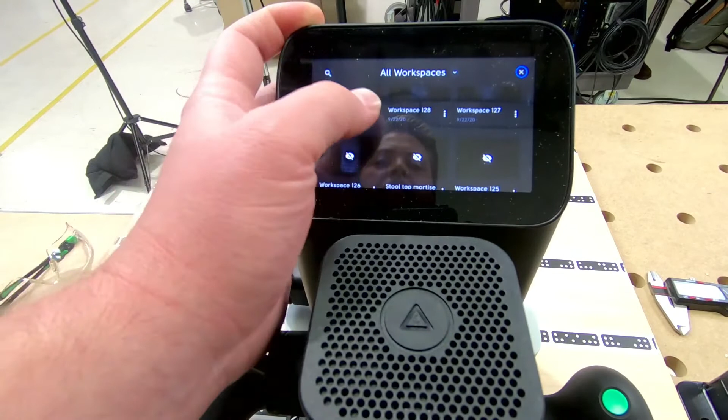So you just go into Scans, Workspaces, and then the little 3 dots come up with the option of renaming, duplicating, or deleting. So you can just delete that there. For the most part, we'll just leave it in at the top - there's all workspaces, and you can choose visible workspaces.

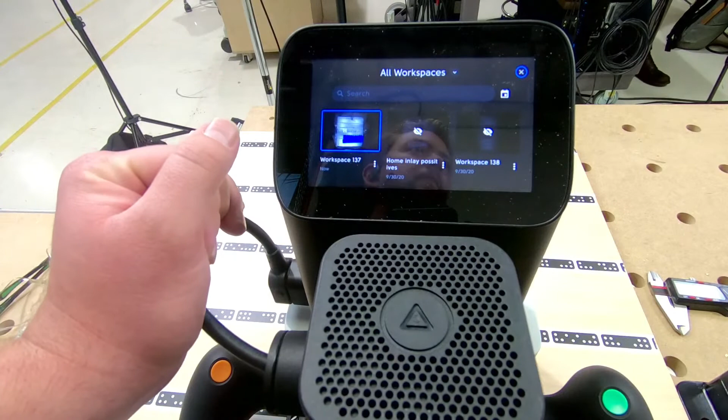So to avoid the clutter of seeing workspaces that are redundant or not currently in view of Origin, if you just hold your hand in front of Origin, you'll be able to see - the moment the camera can't see that particular unique tape field, it thinks there's no workspaces available. The moment it sees them, they're available for cutting. So in this state, you keep your handling of workspaces as simple and predictable as possible.